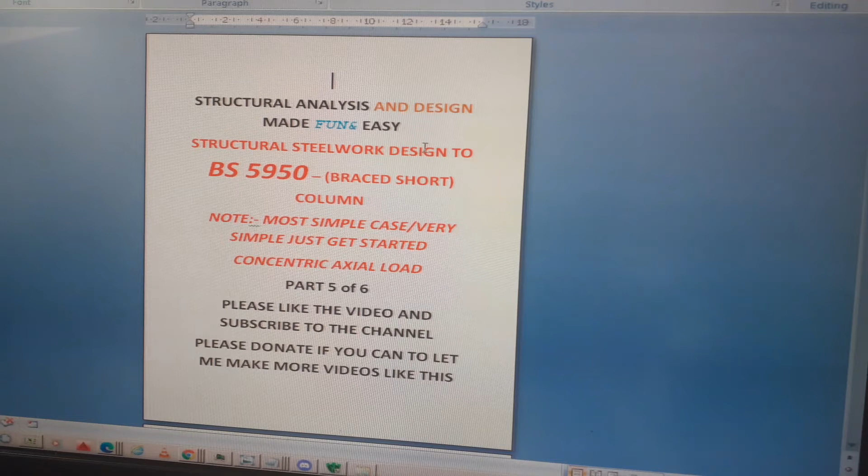Hello again, this is Structural Analysis and Design made fun and easy. This is Structural Steelwork Design, the BS5950 braced short column. Note, this is a simple case, just very simple, concentric axial load, just to get started.

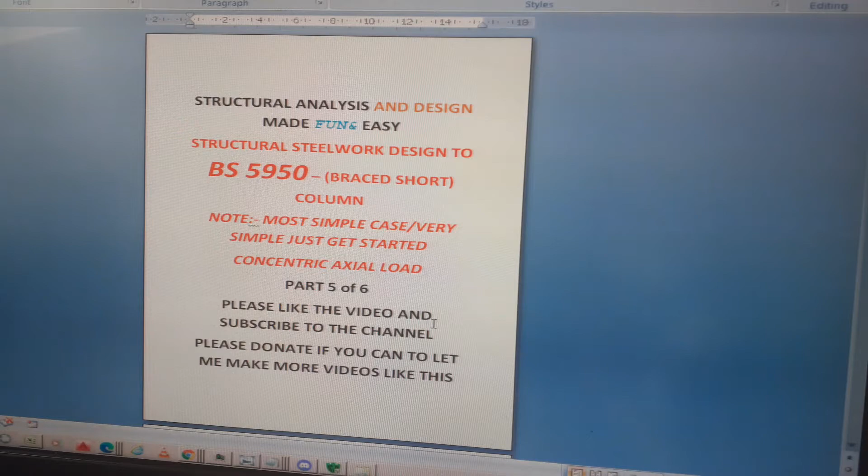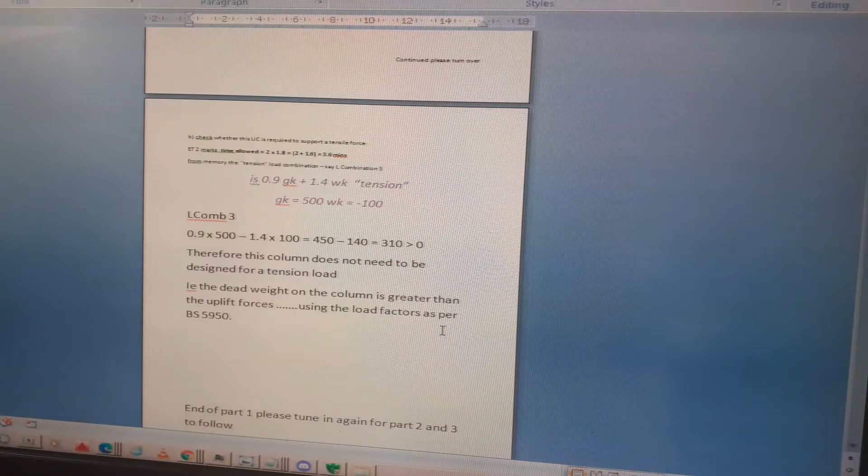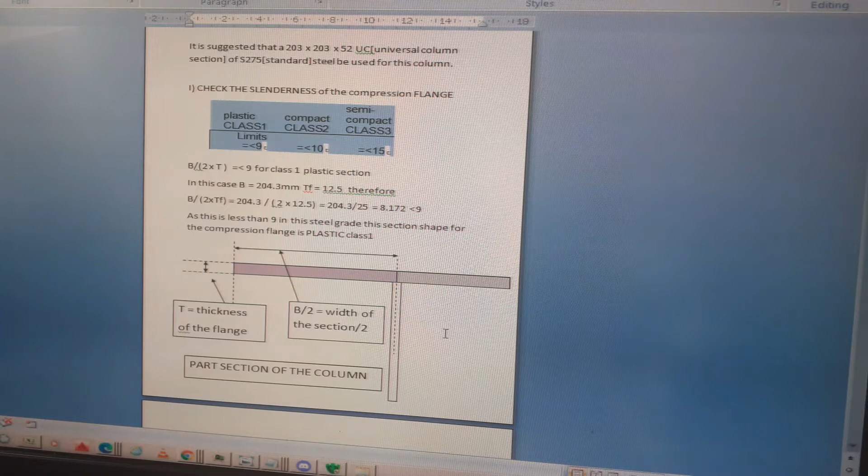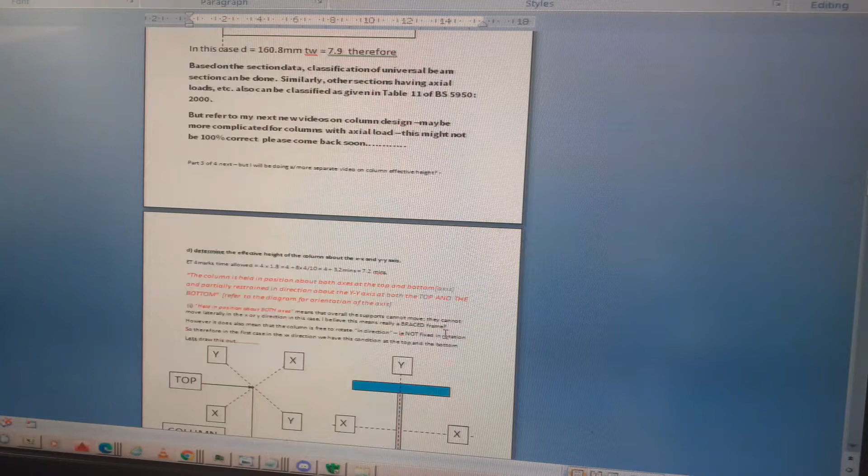So in the previous parts, I've done factored loading, a bit about concentric load, load combinations, and then checking the local buckling of the section, working out the plastic section type the section is, like plastic, compact, semi-compact, ratios of the web and the flanges to the breadth and the depth. And then in the last video we looked at buckling about the x-axis. Please watch the other videos and then you can see all the good work that I did.

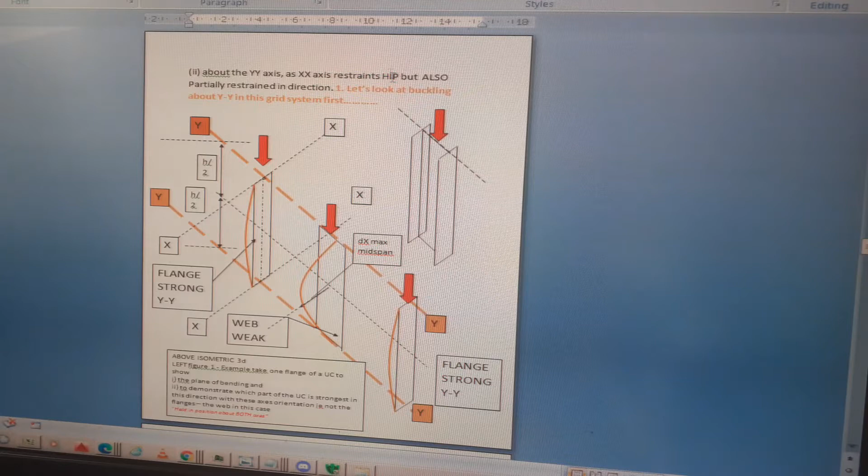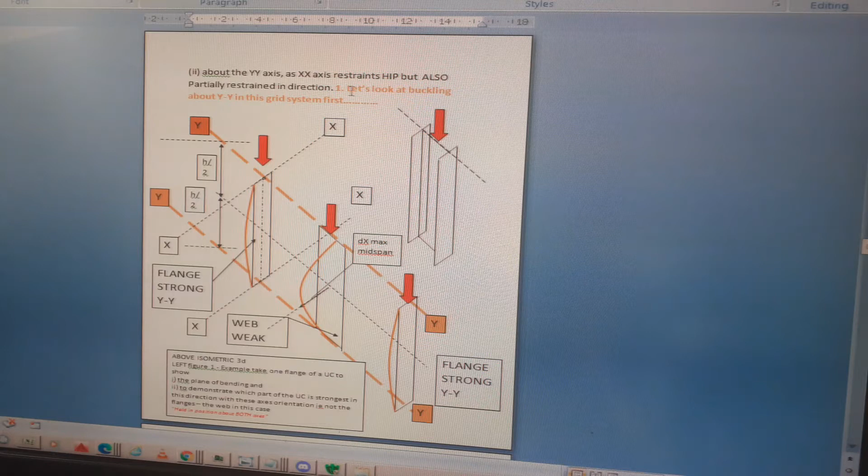This is now buckling about the y-axis. So to start off, it says about the y-axis, as per the x-axis, the restraints top and bottom held in position. If you just watch the other videos when I go through the question, that means top and bottom held in position, that means it can't move, so that means it's pinned, and then it says but also partially restrained in direction.

So let's look at buckling about the y-axis in this grid system first. Consider that this is not the answer to the question, because it says in the question this is also partially restrained in direction. I'll do that in a second, but let's just say for now that in the y-axis, let's look at how it works because of the column orientation and how it buckles.

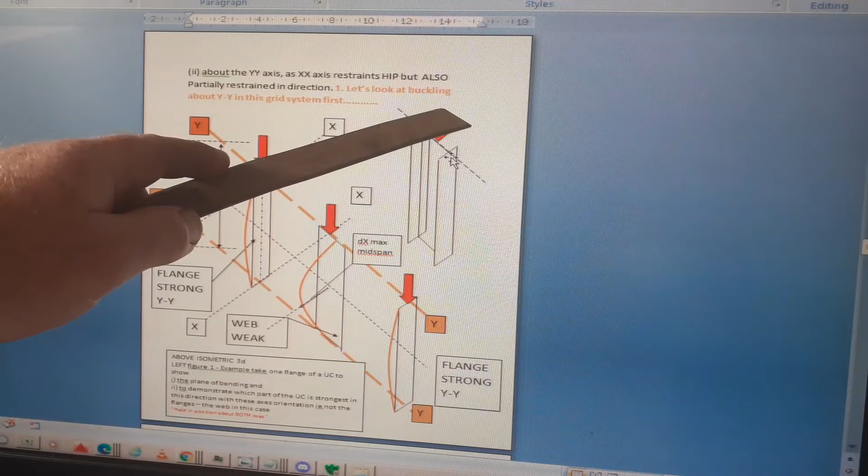So look at the diagram here. This is the actual load, it's drawn a little bit wrong. I've drawn it as an I-beam, but it should be an H section. So what happens is it will buckle about y. That basically means it's going to go this way, so it will buckle and the displacement will take place along the x-axis.

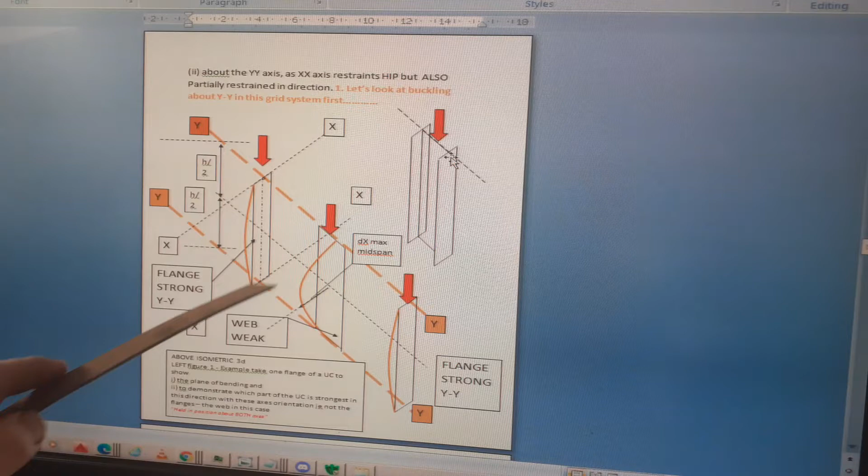That's at 90 degrees to the y-axis. Then the maximum displacement will take place again as it's buckling under h over 2. So in this I'm just trying to explain a bit about the orientation and which axis is stronger.

So basically, a beam is double symmetric, but it's not fully symmetric. Because in one orientation, in the x-axis, when it buckles about the x-axis, you have the two flanges and a very deep web, so it will be stiffer when it buckles about xx, because the web is parallel to the y-axis, but when it buckles about the y-axis, you've got the flanges which are parallel to the x-axis.

So the web is in the same direction, the web of the beam is parallel to the y-axis, so that means it's going to be weaker because it's going to buckle like this. So this time, the web's going to buckle like that again.

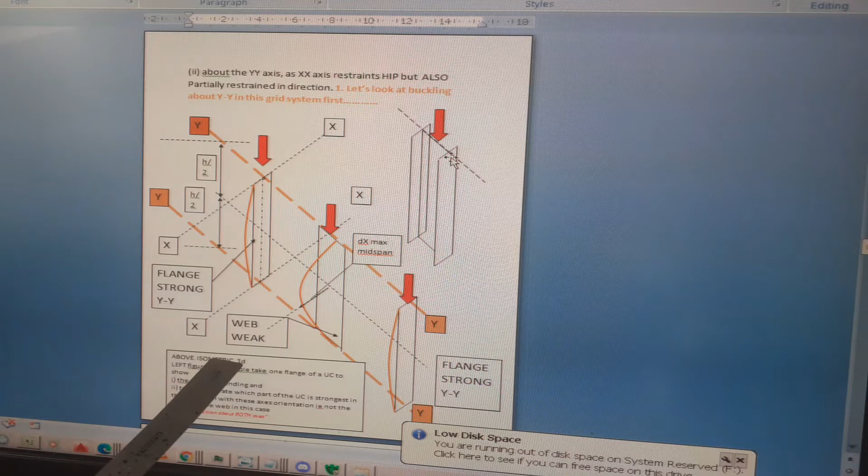The flanges will be stronger in the y-axis. So in the above isometric 3D example, take one flange of a UC to show the plane of the bending. Let's say, for example, on this one, it's going to buckle about that axis. So this is generally called the weaker axis, isn't it?

To determine which part of the UC is strongest in this direction with these axis orientations, i.e. not the flanges, the web in this case. To demonstrate which part of the UC is strongest in this direction with these axes, it will be the flanges, and not the web.

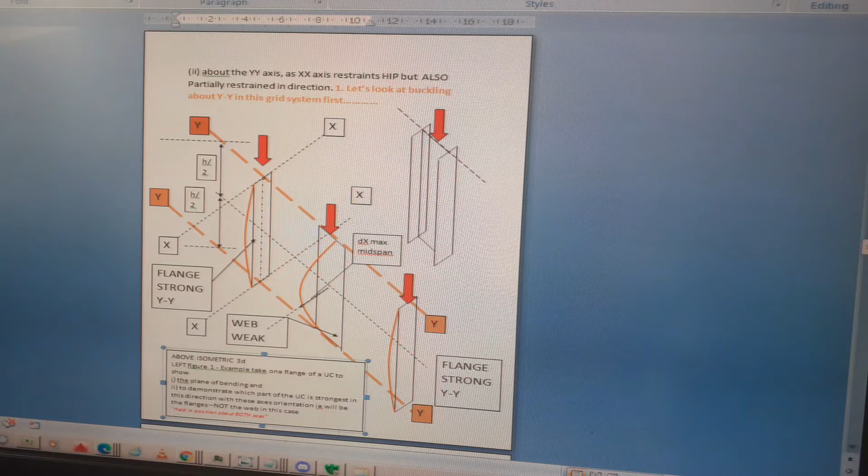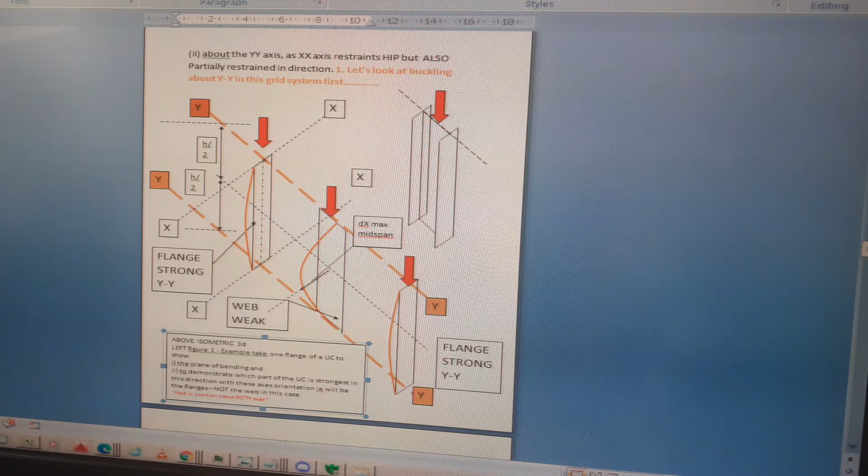The web in this direction, buckling about YY, because the YY axis is parallel to the web and on the same line, that means the web's going to be very weak. So when we look at the column's capacity, we need to be aware that it's going to be weaker about this axis. Although this question has a little twist because the restraint conditions are different, so it's a little bit tricky because in the XX axis it's pinned, so that's LE equals 1.

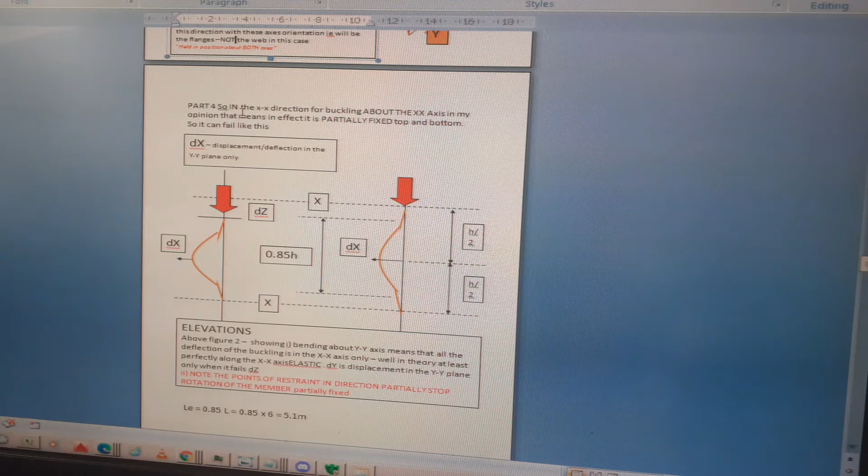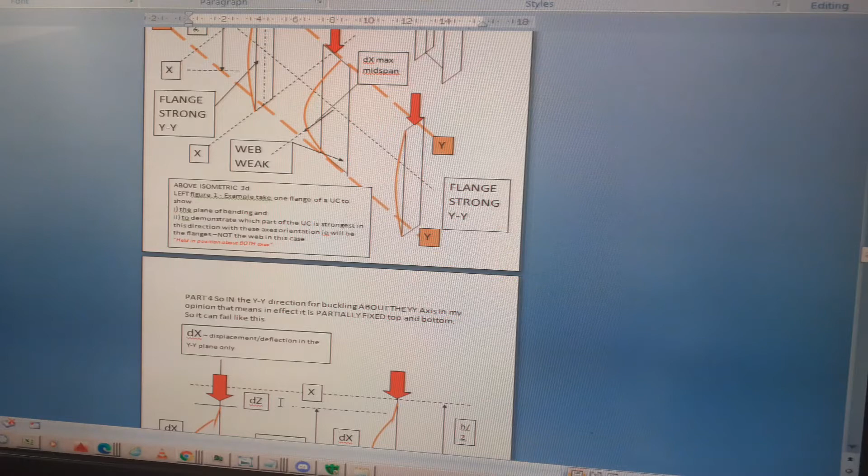But so now let's look at what the actual effective length is. So in this case, in the YY direction, for buckling about the YY axis, in my opinion, it says held in position, so that means it's pinned, but also partially restrained in direction. So that means it's partially fixed.

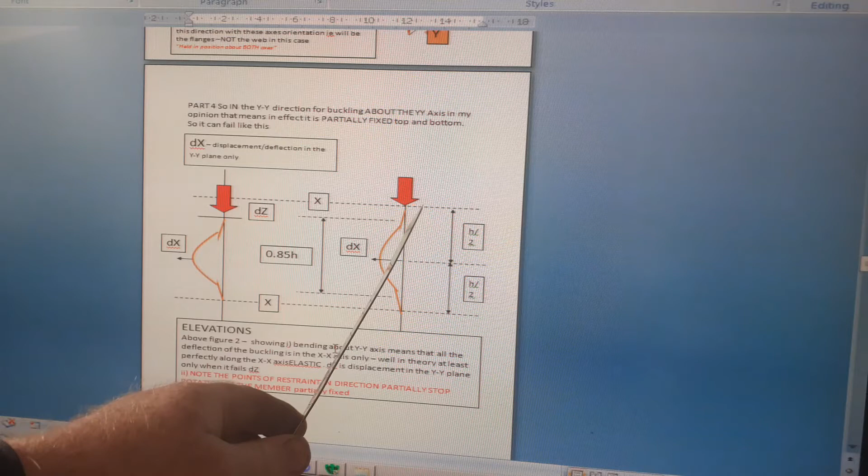So in this diagram I tried to draw it. It's a bit hard to draw in Word because it isn't really a drawing program. So the ends won't be fully vertical, but they would only deflect a little bit, and then it'll buckle between those points which have deflected. So I've tried to draw it as best I can. Just say the top and bottom of the column can move say 5 or 10 degrees, and then the rest of it's free to move.

It's partially restrained in direction, so to me that's partially fixed. That seems a bit weird, I need to do a little more research, to be honest. I don't know how that works exactly - it could be a braced frame, or a partially braced frame.

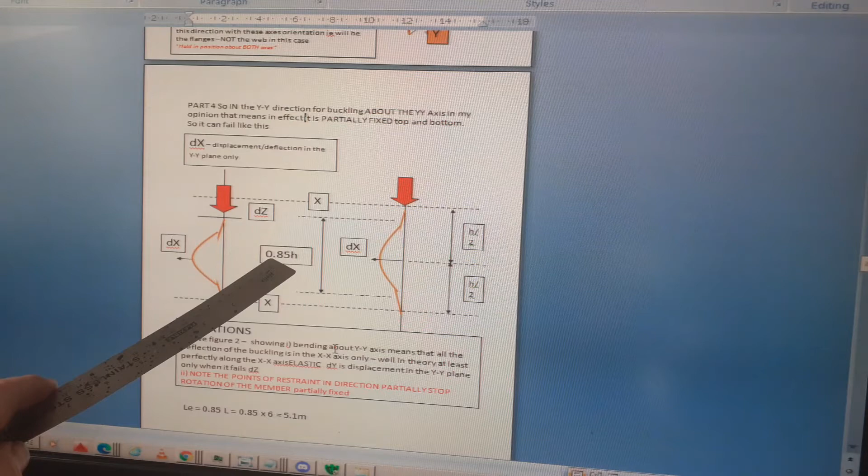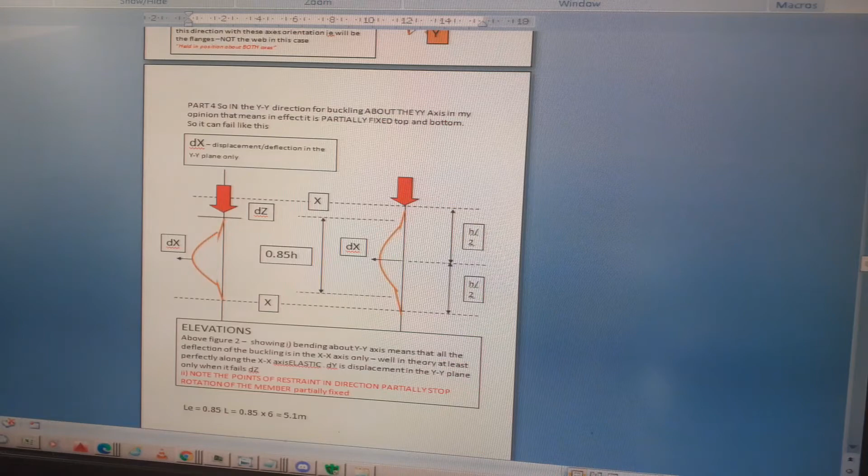But in this case, the effective length is gonna buckle mainly between there and there, and the effective length factor is effective height equals 0.85h. So the effective height is 0.85 times the total length, as I just tried to draw it - let me zoom in.

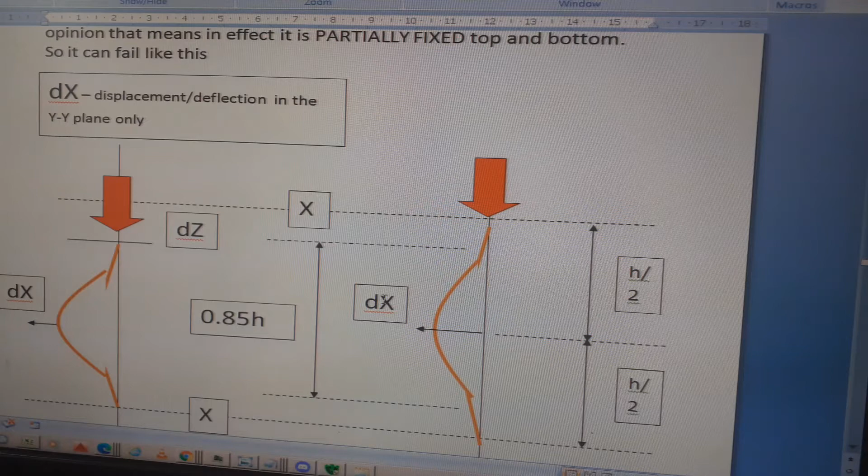Yeah, you see it a bit better there. I'd just say it buckles between there and there. This little bit is partially held in direction at the top and bottom, but mostly it buckles about here. So again, you have the maximum displacement about the DX axis elastically, and then when it fails in plastic failure, you get deflection in DZ and DX - the X deflection this way, and the Z deflection down.

So that's basically - we got LE equals 0.85 for the restraint position. It's held in position top and bottom, partially restrained in direction top and bottom, so therefore LE equals 0.85L. 0.85 times 6 is 5.1.

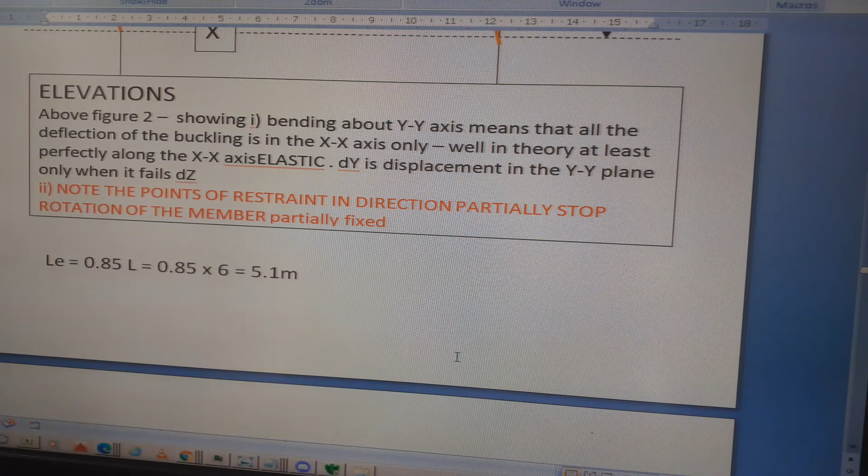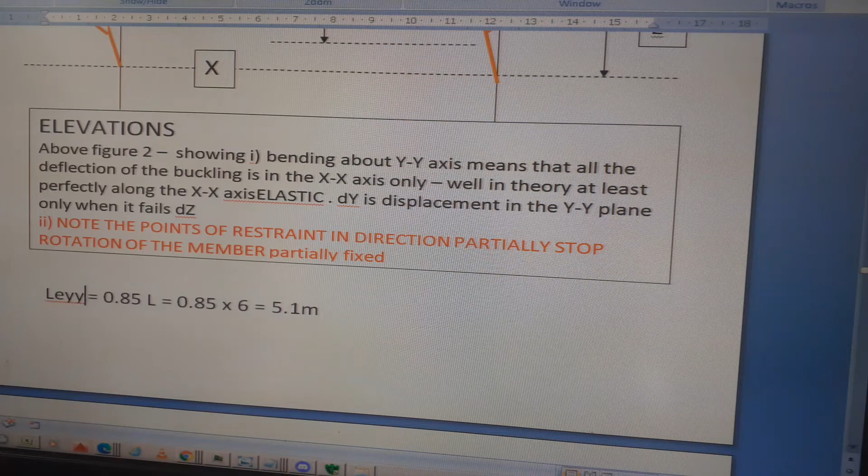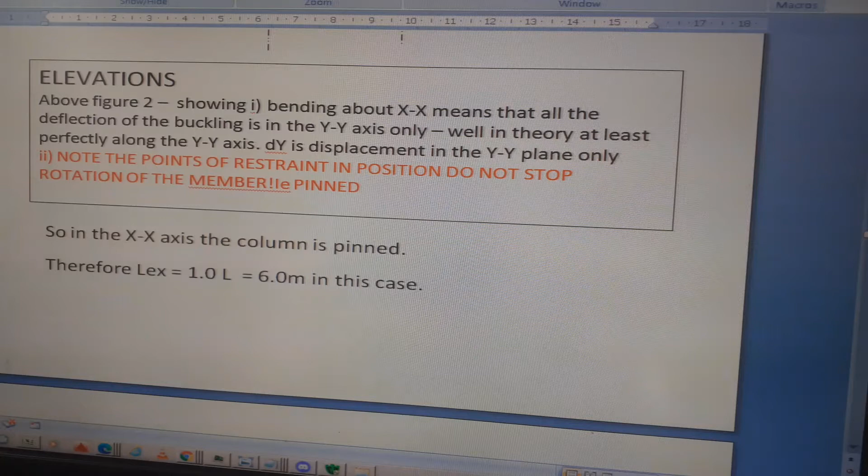So now we've got the effective length factors - sorry, that should be LEY or LEYY. And we already know from before that I worked out LEX is 1 times L, which is 6 meters.

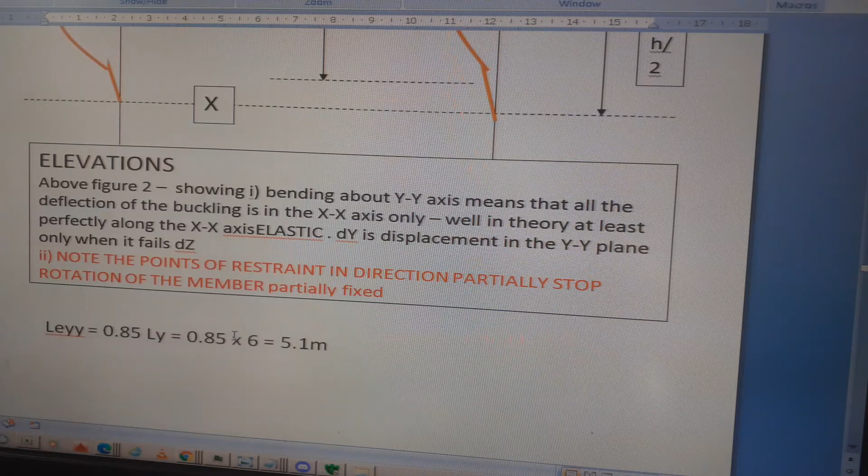So then we can move on to the next stage, which is designing the column. It doesn't actually ask for this in the question, but while I'm doing effective length I might as well explain - not in the question, but if it was fixed at both ends, LE, let's say X or Y, if it was fixed in direction...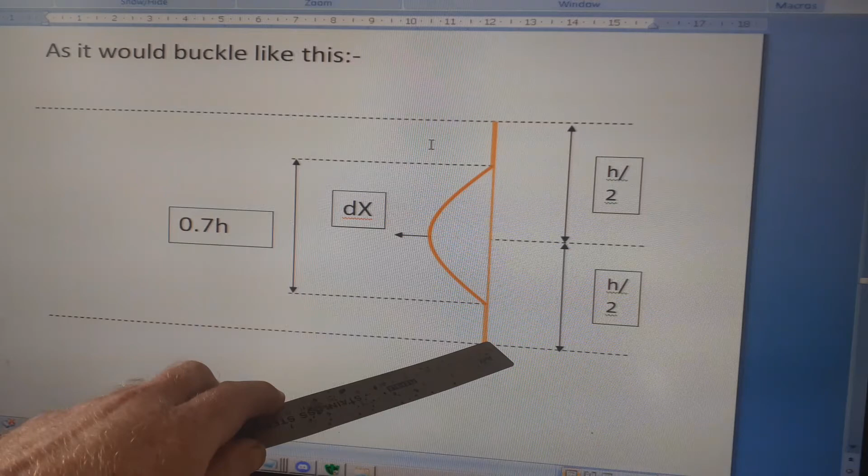LE would be 0.7L, and it would buckle like this - this would be the buckle pattern. It'll be straight, and then it'll buckle between those positions, somewhere symmetrically in the middle of the height, with the maximum dx or dy again in the middle, and the effective height would then be 0.7h.

But if you go to BS5950, it works out all the effective height factors - it's all in there. I might do a separate video just on effective heights, because there's quite a few combinations, and it can be quite confusing if you're just getting started. I didn't really understand it when I started, to be honest.

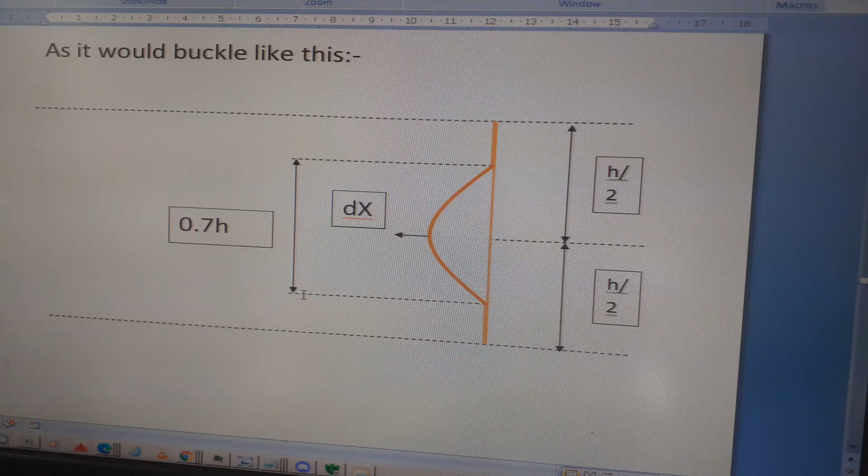So this is the end of part 5. Hopefully see you in part 6, where I've finally designed the actual column for the actual load.